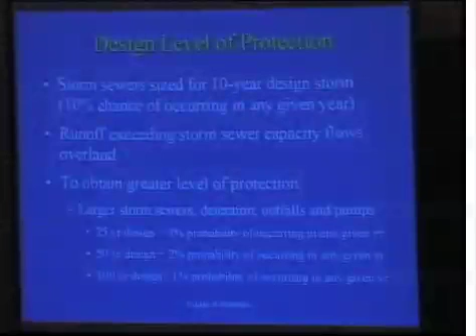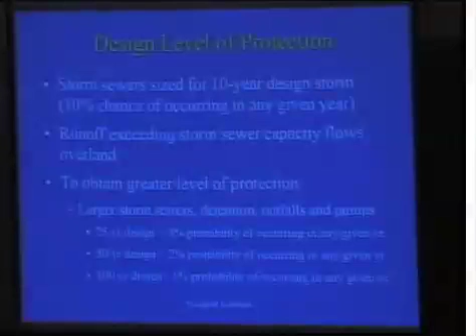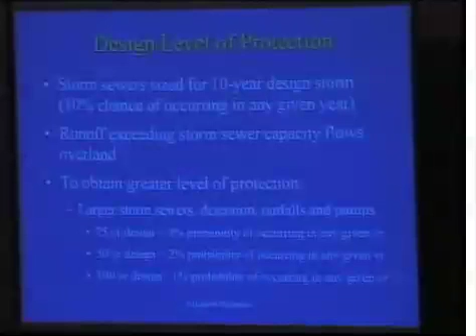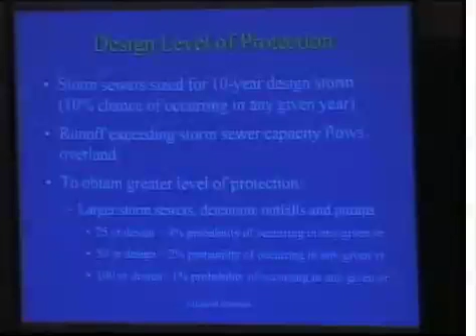As a reminder, storm sewers are typically designed for a 10-year design level, meaning a 10% chance of happening in any given year. When water comes off of roads, houses, sidewalks, roofs, it tries to get into the storm sewer. When it cannot get in, when the storm sewer fills, it goes over land, whether through a street, a yard, or people's backyards, and it tries to get to the lowest point. We are in a very flat area, and unfortunately it doesn't run very well and often gets trapped in areas, ending up flooding both streets and, as we've seen, houses. So the runoff that cannot get into the storm sewer flows over land. How do we get that water safely conveyed so that it's not flooding people and roads are passable?

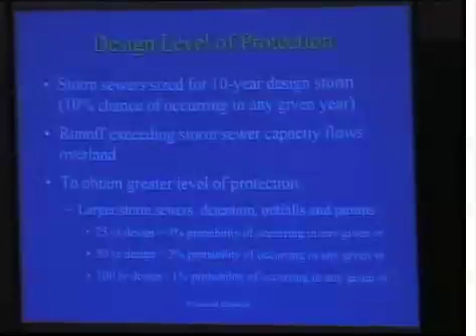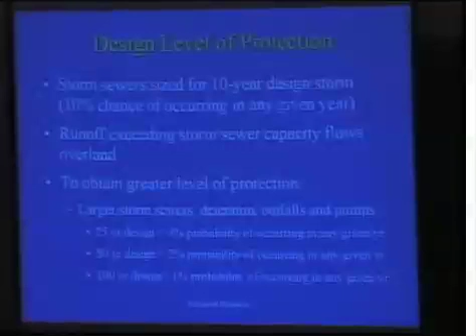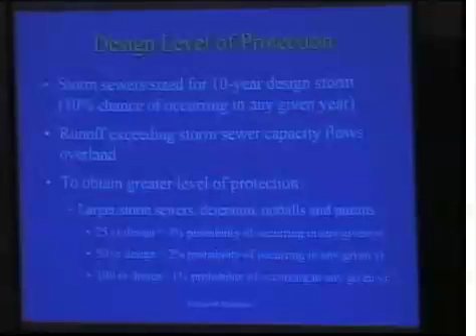So we looked at obtaining a greater level of protection. You asked for a 25-year design — what is that? That's a 4% probability of occurrence in any given year. A 50-year design is a 2% probability, and a 100-year design is a 1% probability. I say that because people want to think that if you have a 100-year storm in 2011, we're not going to have one till past 2100. But it's a 1% chance in any given year, so we could have a 100-year storm this year, next year, or in 10 years. It's a probability, a statistical number.

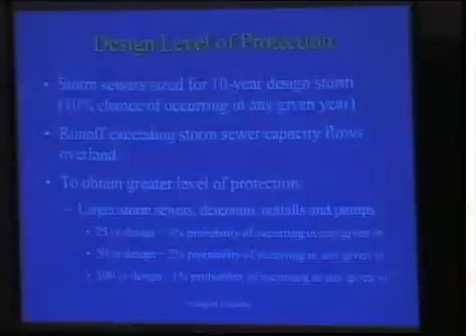We looked at, as President Tucker mentioned, field investigations. We were out there while it was raining. We stopped by, talked to several residents, went by many streets, did a lot of observations. We also met with Steve and walked a lot of the streets afterwards. We had 857 flood questionnaires that we've reviewed since we started this project. Flood questionnaires are very useful, with residents telling us what happened at their house — how much water did they get in their yard, in their basement, etc. We looked at all that information. We also looked at additional information provided by village staff.

We had the storm sewer atlas from the village, which we put into all of our models — meaning the size of the pipes, what's the slope on the pipes. We also used Cook County aerial topographic mapping. As I mentioned, when water can't get into the sewers, it has to run overland, so we rely on the aerial topographic maps to see which way the water is running, which way the topography is going. We'll illustrate what that means. So that's the information we used in our analysis.

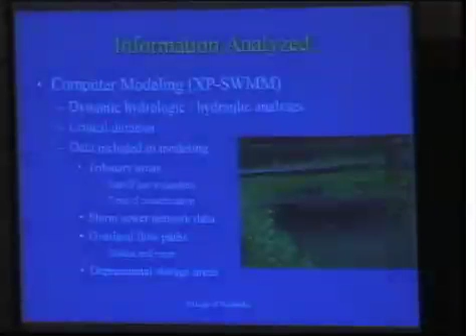We took that information and put together a complex computer model. The computer model was very beneficial because it's the same model we used when we looked at the 10-year event, but now we're running significantly higher rainfall amounts.

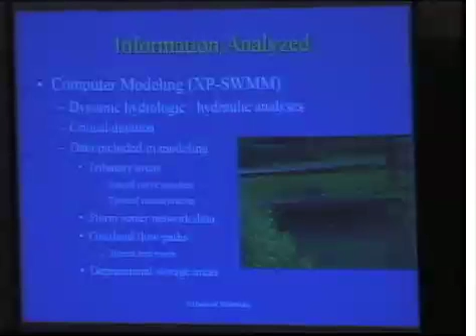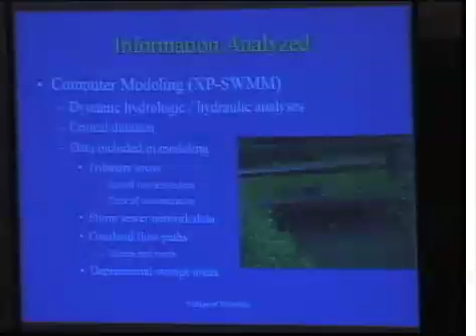We updated the hydrology, the amount of rain that occurred, to reflect the 25-year event, the 50-year event, and the 100-year event. So for the 10-year event, it's about 3 inches of rain over 24 hours, while the 100-year event is over 7 inches of rain in that same 24-hour period. So we updated the model to reflect that.

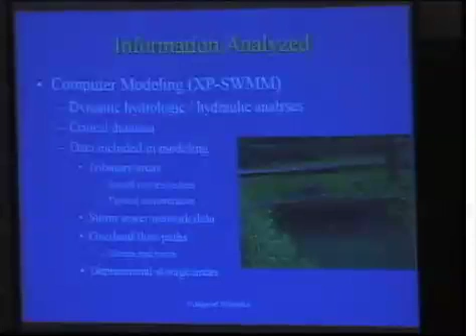We looked at different conditions. The 100-year, 24-hour rain is 7.5 inches. But you could also have a 100-year, 1-hour storm. As the village witnessed, that July 22nd-23rd storm event was really over 6 hours, with much of that rain coming in a 3-4 hour span. So it doesn't have to be 24 hours.

When we looked at our model, we looked at all different durations - a half hour, 1 hour, 6 hours, 12 hours, etc. - and whatever gave us the highest elevations, we used that. So it was what we call the critical duration, the one that gave us the highest elevation, the worst results, and we went with that model.

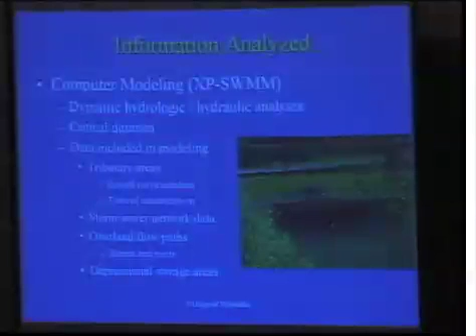What does that model include? It includes tributary area - when we look at an area, what streets, houses, everything, is flowing to there. That's an input we put in. How many acres of land is coming to that storm sewer? What is the size of the storm sewer? What's the slope of the storm sewer? What is that storm sewer made of, what material? All of those affect the hydraulics, how the water moves from one point to another.

When we look at not only the size of the area, we look at how impervious it is, how quickly the water moves from one point to the next. And the storm sewers have to be connected from one to another - they might be the same size or different sizes, you might have 3 storm sewers coming together. All of that plays a role in how the water moves from one point to the next.

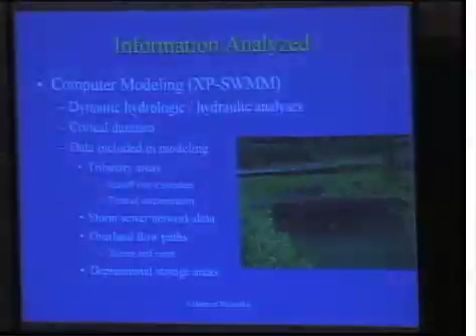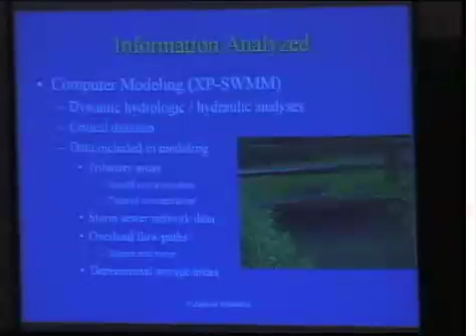So the model we developed takes all of that into account. And again, when the water cannot get into the storm sewer, it has to flow over land. So everywhere we have storm sewers, we also have to find where the water exceeds the storm sewer - it's going down this street or through these yards - and we need to find that throughout the village. There are also some low-lying areas that retain and hold water for extended periods; we call those depressional areas, and we include those in the model. So that's the information analyzed and put into the model we use to look at these different areas.

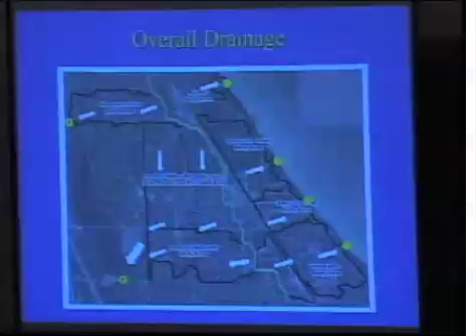Greenwood Avenue Study Area is another one - the Ravines, Spruce Street Outlet, the Cherry Street one, and finally the Underpass area, which includes the area both east of the railroad tracks, as well as a short area west of the railroad tracks and east of Ridge Road. So those are the study areas we had - the overall drainage areas flowing to the west and the areas flowing east to Lake Michigan.